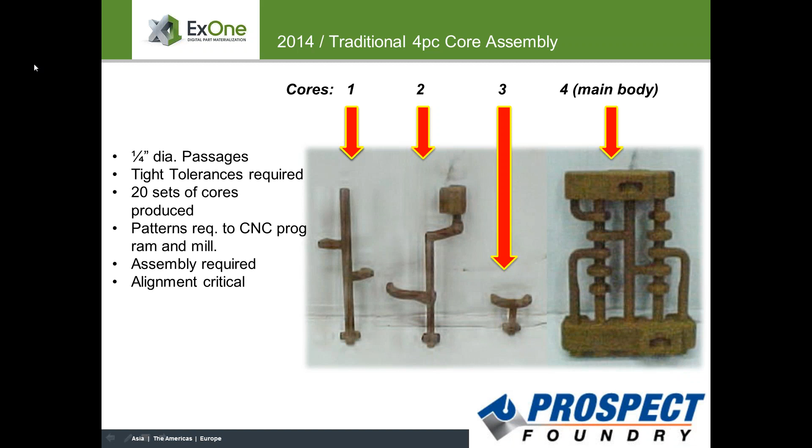And then just to turn around and scrap 50 to 70% of those castings every time was just driving the part further and further. It made us realize why the previous foundry was no longer trying to produce the part. So you guys were aware that you'd probably be running into some alignment issues and things like that, probably when you initially started looking at this core. I would assume with your experience, if we take a look a little deeper here.

Right, yeah. And with assembling 4 separate pieces of the core together, you have some variation dimensionally. And so Greg started doing some research and came upon your process here. Well, actually, first of all, this is Greg Colosimo.

We tried several different traditional type methods. We used ceramic type sand on the shell machine. We tried zircon sand on the shell machine. And we tried different coatings, alcohol-based and water-based, and some mullite, alumina. We tried zircon-based wash. We did just about everything in the book.

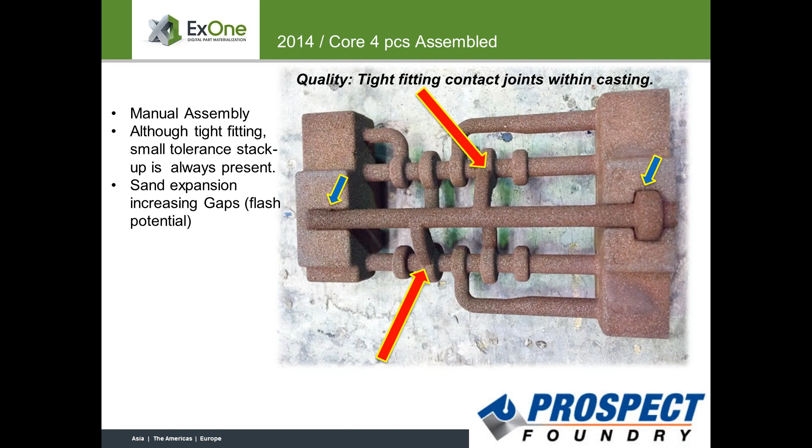And some of the problem that we had was that the paste in the joints would swell and cause misalignment. So even if we did get the part right, it wasn't always lined up perfectly, and the customer had to reject them because they couldn't drill the holes properly.

Yes, if we look at the core, certainly it's a quality pattern-making job that you guys had done here. But like you said, as you're adding core paste and wash, you guys are running into some issues down the road. Right, and keep in mind, these guys were doing 400 to 800 pieces at a time. So you had multiple guys on different shifts, third shift, second shift, first shift, all different people.

And different guys have different work habits, or they have different technique. That's what it is. Yeah. Where one might make a perfect core, the next one might make a just about perfect core, but the measurement of how much they were off is almost indiscernible by the eye. You'd have to measure it with a micrometer to see. So there was some variation there, and that's normal. No matter how well the core box and pattern are made, you're going to have some variation.

And with the 3D printed cores, we've taken that variation out. We've also taken out the need to produce 4 cores and assemble 4 cores and handle 4 cores. Getting one core that is virtually identical time after time, core after core, was fantastic.

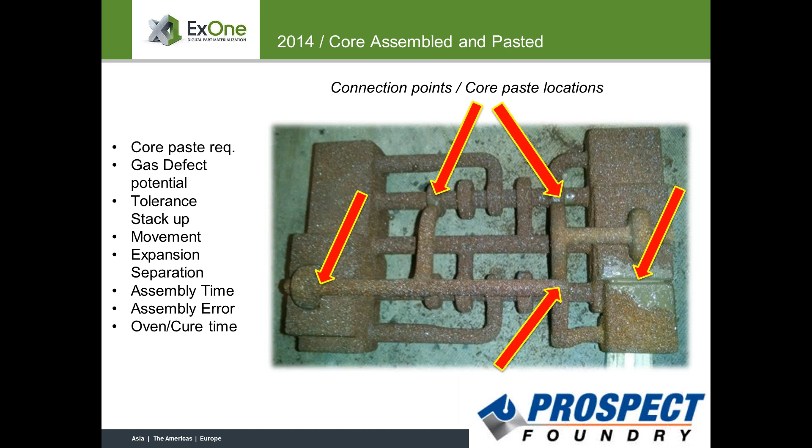So again, looking at this more traditional core here that's been pasted together, you had mentioned all the different idiosyncrasies that can happen here, and certainly the glue has to be dry as well, right? From a pasting perspective. So you guys are almost making it sound like there's more than one way to screw up a casting, right? Absolutely. Yeah. Absolutely. Wow.

So now, again, once you start with your traditional approach here, and you set these cores in the mold, you guys are probably under a little bit more pressure right now to get this done from your customer, because he's still late, isn't he? Correct, and that was the other thing, the timing. It was a hot item with the customer because of the lack of success from the previous foundry. So we were kind of under the gun from day one, and then finding all the issues and all the problems, and just having enough time to produce and assemble, as I mentioned, all the cores, just put a tremendous amount of pressure on us.

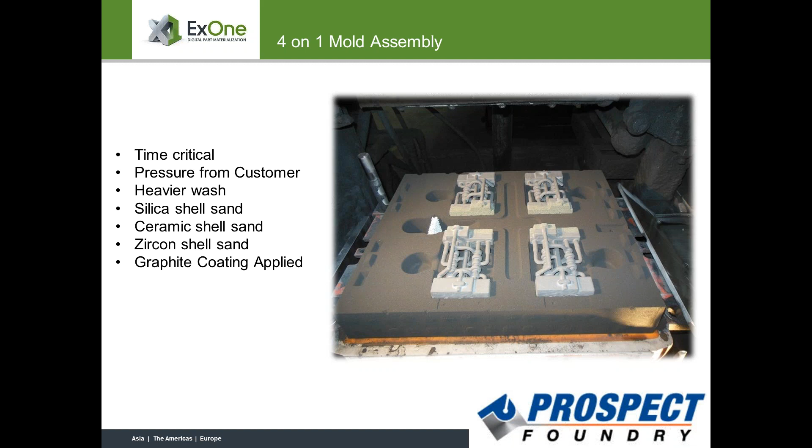And as you'll see in some future slides that you have here, the problem with the castings, all the trapped gas that was in there, and Greg related to that. There you go. That's some of our earlier castings that we made with our cores, and all the gas that was generated, because you're pouring iron at 2,600 degrees into a sand mold and surrounding that small little core with all this molten metal, you're creating gas, and that gas has to go somewhere. So with ExOne's process, in discussions with Greg, between the two companies, we came up with the best solution, the best type of core sand to really pinpoint and eliminate our main problem that we had.

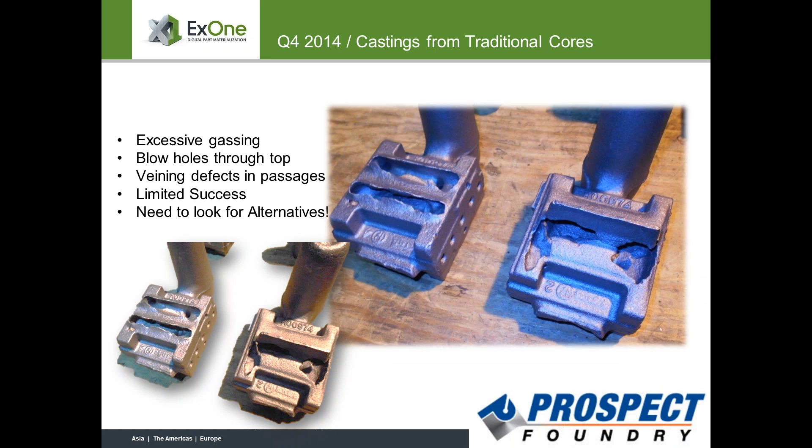Right. So again, Foundry A obviously went about this in a more traditional way, using traditional patterns. When it got turned over to you guys, Foundry B, or Prospect Foundry, your initial knee-jerk reaction was to go about it in a traditional way, to say, hey, let's just create our patterns and move forward. So as far as even considering 3D printing early on, it was really not in the front of your mind to pull that wild card out yet, wasn't it? That's correct. You guys had to go outside and find some additional solutions here, in a little bit of a panic, I would assume. Not quite a panic, but you're on the right path.

Yeah, when I went to the AFS regional in 2015, one of my key jobs there was to find some kind of way to fix this problem. And I talked with a lot of vendors about core coatings and about non-traditional types of sand media, a replacement for sand media, to make the core out of. And these were very expensive solutions, and I couldn't see that it was going to create something very much different from what we already had. And then I talked with the gentleman at the booth at ExOne, and when we finally found out how much it would cost to make these cores, compared to our limited success plus all the work that we put into it, we found that it was actually cheaper to get the cores printed. It costs us less.

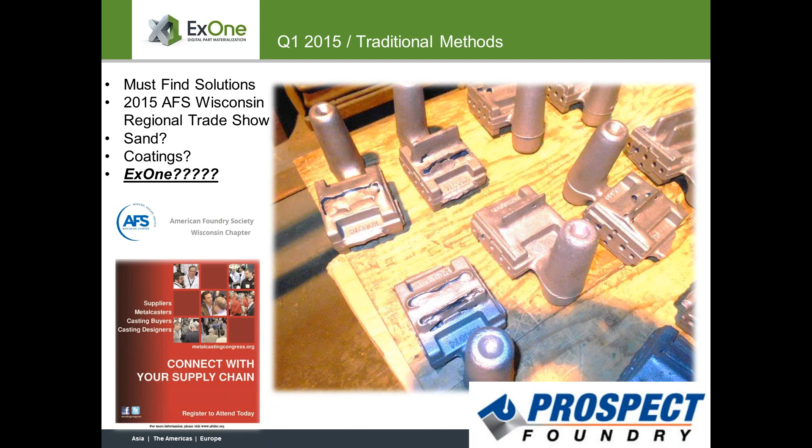Right, and that's not even including all the hidden costs and the potential lost confidence from your customer, potential new work because you can solve their problem. I could go on and on about that. So basically, if I recall correctly, at the trade show, which was just a mini regional show up in Wisconsin, when you had stopped by, I believe we had a sample core on the desk, and you said, "Boy, I wish you could print 1,000 of these for us," right? Exactly, that was right. And you actually said, "Yeah, we can do that for you." So you made a phone call right there to your shop to see if you can combine some cores, right?

I think we sampled 4 different types of resin and sand, and we finally arrived at the best solution with the help of the team at ExOne. From that point on, we actually thought we were going to lose money in 2015 because of this job, but we actually ended up just about breaking even. And then the next 2 years after, we've done very well with this part, very well.

The benefit for getting the different cores, you know, it's the same core, but the different processes, the different types of sand or the amount of resin. The reason that's important is because different part numbers, different foundries, and different part numbers in those foundries, you might be fighting a different animal. Are you fighting an animal where the assembly time is killing you, or are you fighting the enemy that the trapped gas is killing you, or some other thing? Maybe the cores are breaking, or et cetera.

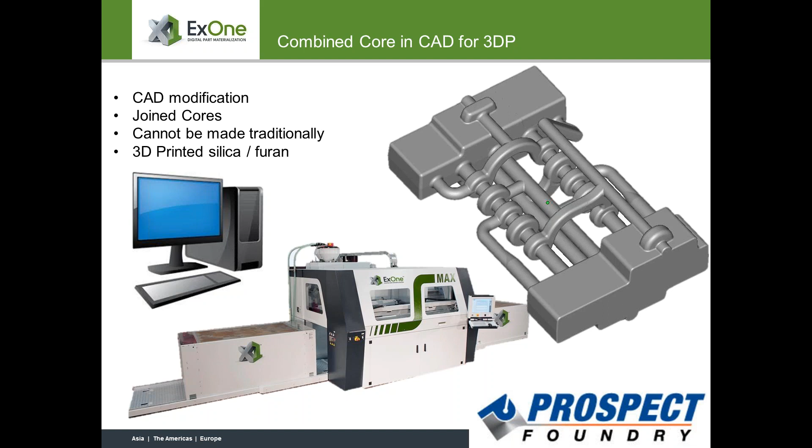You could go on. In this case, it was not only the assembly time, but the LOI and the trapped gas in the mold. So we really got a good double punch of saving time on assembly and improving that LOI so that we reduced the amount of gas created in the mold in the first place. It's just a win-win on both situations. So, you know, one type of core across the board isn't necessarily right — it's good to test different things, is the point of that.

So when we run these cores over at ExOne, again, we've printed thousands of cores for you guys at Prospect for quite some time. A couple things - again, we kind of initially solidified on the furan and silica option, which worked out well, and you guys applied an alcohol core wash to that, which appeared to work best out of the different sands and binders that we have tested.

But I think what people should understand too is that from our ExOne adoption centers, we certainly do our best to maintain high quality cores as well, and those that have machines certainly try to do the same, obviously. But one big thing is the 50% humidity that we try to lock in our shop here, plus or minus a few points, but nonetheless that allows us to use a consistent amount of binder and activator throughout the year, and have lower LOI, higher strength. And as you had mentioned, Greg, what was your LOI initially with the traditional cores?

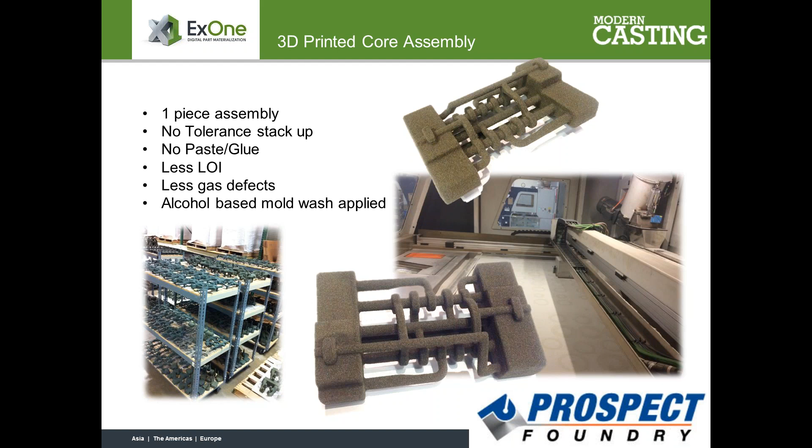No, that's again — there's a lot of things. I think a lot of customers, if there is even a slightly higher scrap rate of anything, and again, there's a certain amount that's considered normal to the industry, and certainly some experimentation with 3D printing may find some downstream benefits that normally you would not normally see or uncover. But one of the biggest things is shipping is generally not our friend when it comes to 3D printed molds and cores, and so we've gotten very good at it over time.

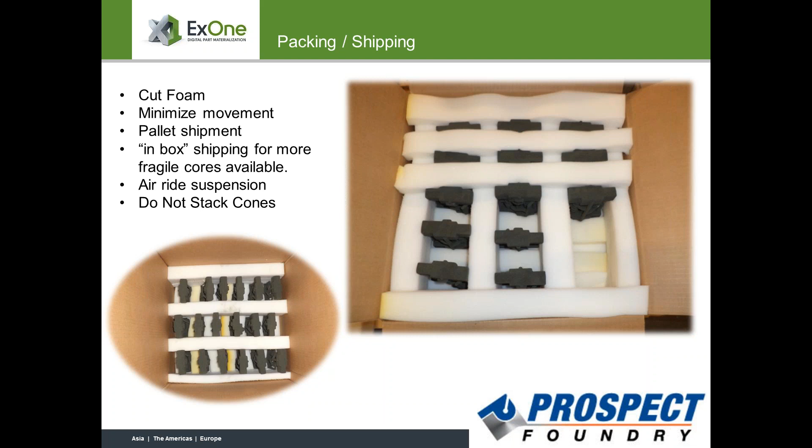And I know you had mentioned that our initial packing strategy was not as efficient as what we do today, but certainly we've gotten good at shipping cores over the years. And if cores are too lacy, what we can do is ship them in a box with loose sand in there to help support the core during the shipment process. So it sounds like, though, with everything that you guys have received, you guys have been pretty happy from a shipping standpoint.

Absolutely. This particular core, as small in diameter as the passages are, is about as fragile as you can get. You've got big, heavy core prints on the end, and then you have all these quarter inch, or actually slightly below quarter inch, passages running through this thing. They're very susceptible to cracking and breaking.

And the packaging that you send them in is fantastic. We very seldom see a cracked or broken core. We also run our own LOI test here at Prospect, so if we don't find a cracked or broken one in the box, we end up breaking one ourselves just so we could run our internal test.

That's right, and that's one thing that's been true from day one since the first shipment. There might have been a lot of foam in there, but we didn't see any broken cores. That was one of our initial worries when we talked about ordering these — the guys in the office were saying, well, how are they going to ship these cores without breaking them? Because we bought larger cores from other vendors, and when they arrived, they'd rubbed against one another or in some way broken.

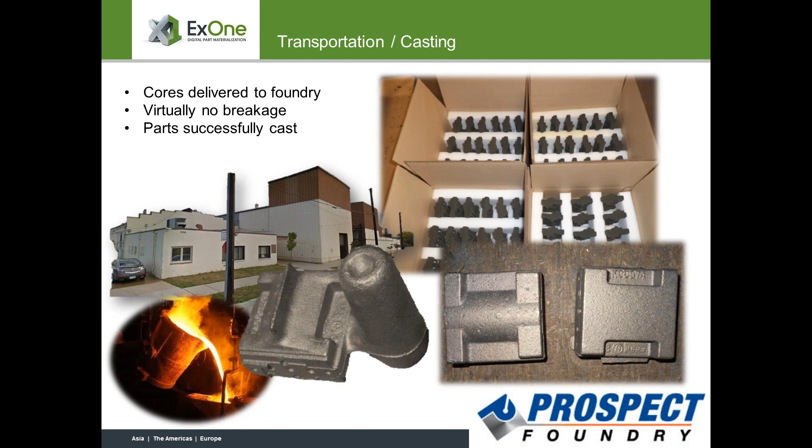A success story, no doubt — it solved our problem and it made our customer happy, and it turned a losing job into a winner. I think we've made over 3,000 castings this year so far, in September. So we'll see, we might hit 4,000.

Great, yeah, no, that is excellent. And certainly the question is, what does it cost not to have 3D printing? You can try to assign a dollar value to that, but what do you guys suppose Foundry A — the one that initially had the job pulled from them — is thinking? I know you mentioned you don't want to be that guy, the foundry that could not deliver, right? Just curious how you guys see it.

Well, if you look at what it costs, let's start from the beginning. First, you have to rig the tooling to run in your shop, and that costs a few thousand dollars to get the gating system and pattern ready to run. And then if you run a test, breaking into production on whatever molding line you're on, and you run your samples — it probably costs anywhere from $1,500 to $2,500, depending on what the machine is, just to run that test, process the samples, and have the people cut them up, inspect them, et cetera.

So say you run five, six, seven, ten different tests and you're still struggling with this job — just on an average figure, that's a $2,000 bill every time you're doing that. So there's a lot of lost revenue. And you could be producing something you could sell to a customer at that same time you're running these tests that are failing. So there's a lot of money there.

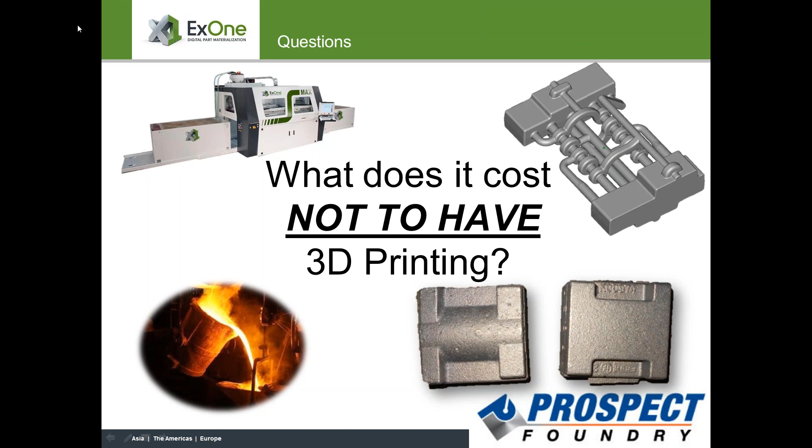As Greg mentioned, there probably isn't a CAD model out there. So depending on the complexity of it and your company's ability to create that, that's something you need to consider.

Moving ahead, more and more, the pattern makers are a dying breed. Now you have machine operators that work off CAD models. So the new part numbers going down the road will pretty much all have CAD models. So now it's just a key of adding those core prints and other chaplet pads if you have such, and so on.